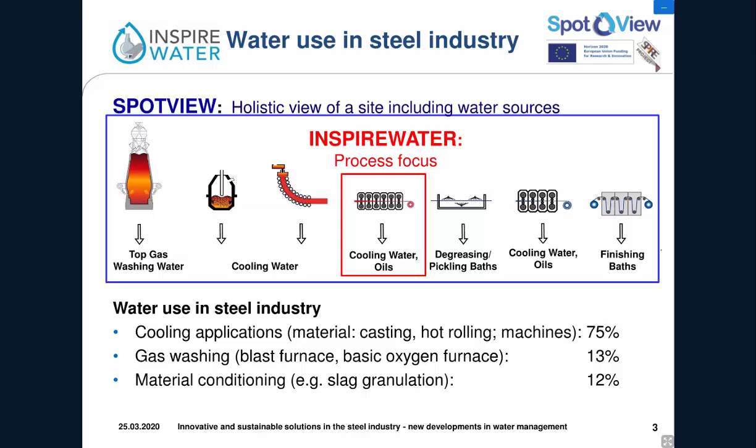So when we look at the challenges in this situation, we have an intake of different components such as solids and grease into the water, we have to add some chemicals to operate these water circuits, and we have the concentration of salts and hardness-forming components leading to corrosion and scaling. And as you can see, we have a complex mixture in these cooling waters, and this leads to a problem if you would like to apply just conventional technologies. These cannot work efficiently on this kind of water.

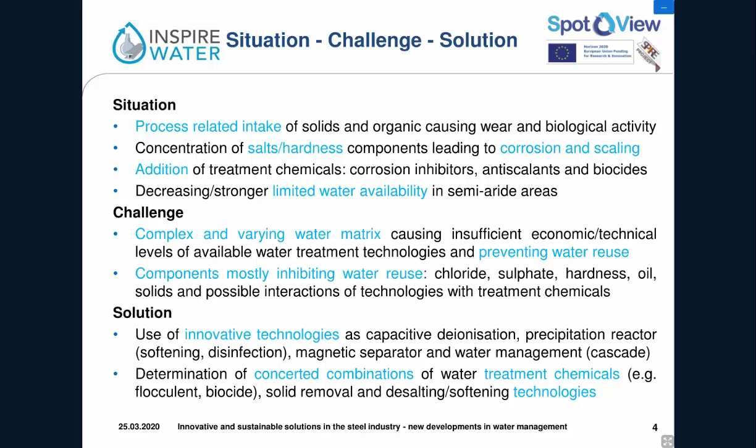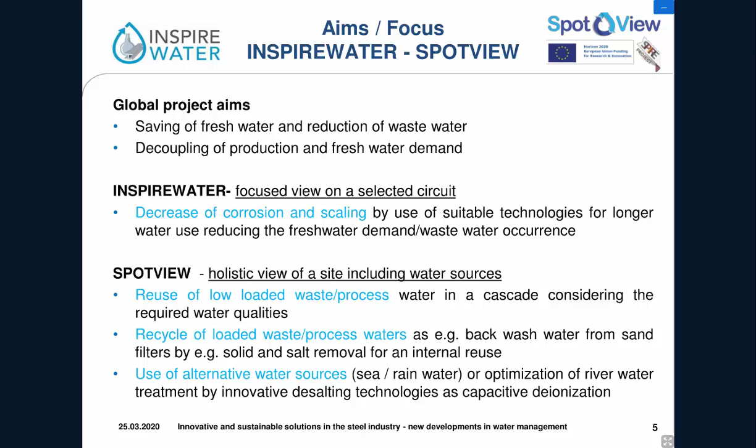So the idea was to use innovative technologies such as capacitive deionization, for instance, to optimize the water management, and to recover and take water from alternative sources. So the aim of saving water is well known, and decoupling production and freshwater demand is one of the most important issues, and I think this has to be solved, but solutions will take time and new challenges will come up. So what technologies did we use?

We used a magnetic separator for the removal of particles. It's operating chemical-free and pressureless. That means we will save energy compared to conventional pressurized filters. Then we had another solid removal technology. It's a combined flotation and microfiltration. The special thing here is that you are removing oil as well. So these two technologies are mandatory steps for desalting afterwards. So independent of the technology you would like to use for desalting, you have to have a special kind of water composition, and this requires removal of solids and removal of organics.

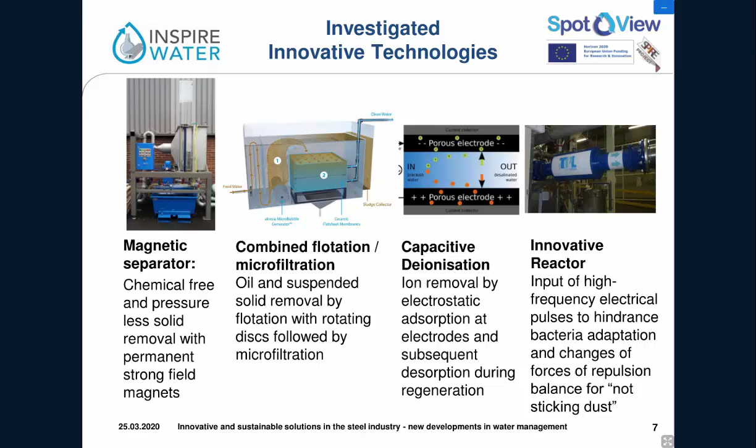Further on, we had the capacitive deionization. It is based on electrostatic adsorption. That means you are collecting the ions on the electrodes in one period, and you have a short time of regeneration where you release these ions again in a kind of concentrate which can be discharged. And the last technology was the innovative reactor, which is based on high-frequency electrical pulses, which destroy bacteria and change the water and particle charge, so that the particles will not stick to the tubes in any way.

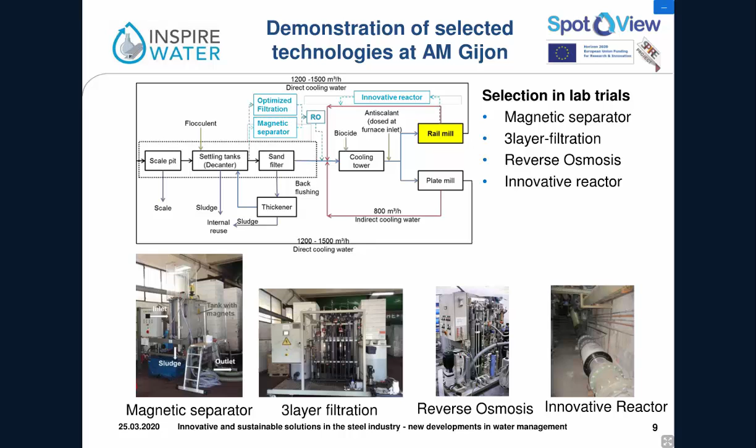So what did we achieve? We performed field trials, and in the lab things always go very well. So the thing is, let's demonstrate it at the site, and not just for a short time, but for about 4 to 6 months. And we did it in INSPIREWATER with the 4 technologies you can see over there. We have the 2 technologies for the removal of the suspended solids, we have the reverse osmosis for desalting, and we have the innovative reactor for disinfection and decrease of scaling.

So finally, what we achieved in half a year of field trial is the treatment of 31,000 cubic meters of cooling water, and we were able to achieve solid contents less than 15 milligrams at the outlet, independent of the varying inlet solid content. And we further achieved a very high solid content in the sludge we produced, about 31 weight percent, compared to 0.2 weight percent for conventional sand filters or multi-layer filters. And we had only a very low amount of sludge. That means you have a much reduced amount of sludge for post-treatment.

The three-layer filtration is a very nice option if you have existing sand filters and you would like to enhance the solid removal. Just replace the sand inside with 3 different layers of materials, and then you can increase the solid removal from 65 to 96%. Or the other option is to decrease the velocity as far as possible.

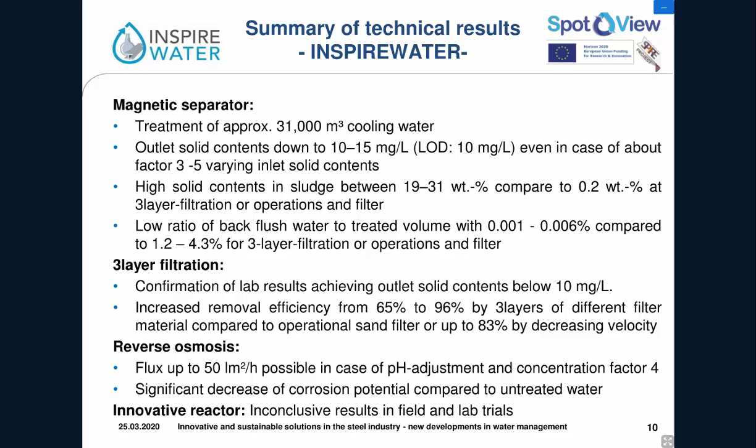With the reverse osmosis, we treated the water produced by the magnetic separator, the three-layer filtration and the operational sand filter, and we were able to recover about 80% of the water, fulfilling the requirements from ArcelorMittal to reuse this water again. Sadly, that's research: the innovative reactor did not show conclusive results in the lab and field trials.

Further on, in SpotView, we took this holistic view. We were focusing on cooling water. So we had 3 different approaches. One was to recycle water, as you can see on the left-hand side. And the idea was to recycle backwashing water, which is loaded with suspended solids of several hundred milligrams and with oil as well, and then treat it and use it again in the process.

The second approach is to make a cascade reuse, meaning an optimization of the water management, taking a look at the cooling water circuits and saying, okay, blowdown from this cooling water circuit can be used directly, for instance, in another cooling water circuit with lower requirements regarding water composition.

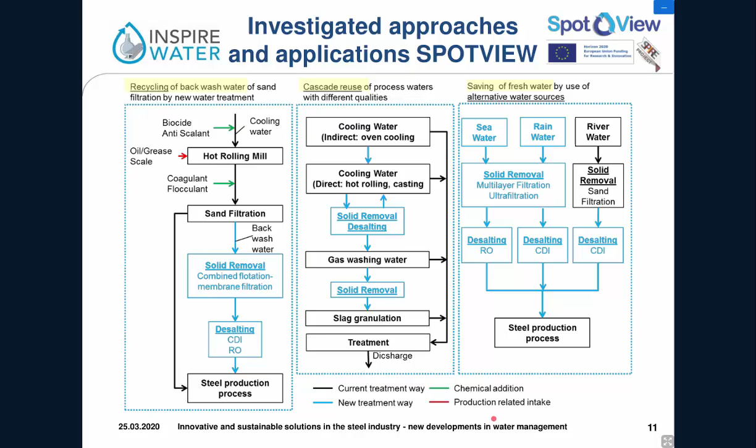And finally, we have the saving of fresh water, saying, okay, let's take a look at seawater, rainwater. What do we have to do with this water before we can reuse it, and determine suitable technologies regarding solid removal and desalting. So we produce with CDI, capacitive deionization, and reverse osmosis, different waters.

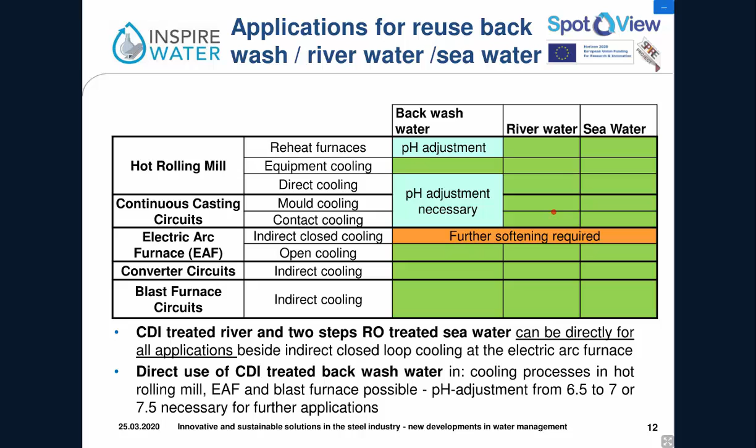And in one case, we have very special and very high requirements regarding water composition. But mainly, we can use the water we produce with CDI and reverse osmosis for further cooling water applications.

Here you can see some data, what we achieved regarding the backwashing water. You can see the flotation with microfiltration. We recovered 89% of the water with a very low energy demand of 0.3 kilowatt hours per cubic meter, and suspended solid content less than 3 milligrams.

CDI and reverse osmosis both allowed the production of a water quality which can be reused in the cooling water circuits of ArcelorMittal, and we had recovery rates between 78 and 85%. Regarding the energy demand, CDI was lower than reverse osmosis with 0.95 to 1.4.

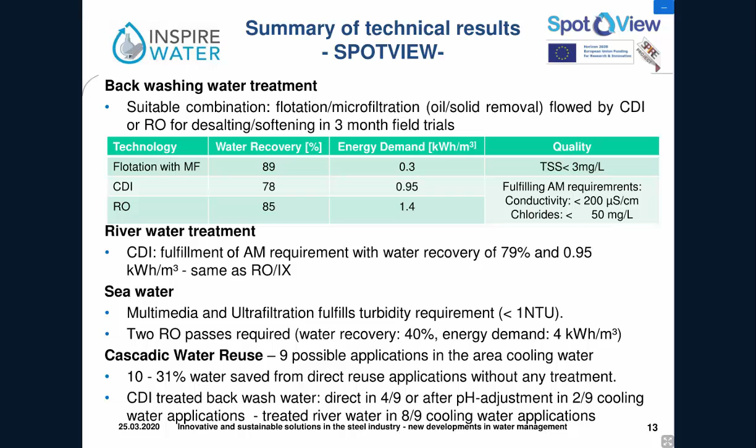And further on, we determined seawater and river water treatment methods to recover this water again. And as shown in the figure before, for most of the applications in the area of cooling water, we can use these kinds of produced waters again.

Backwash water we recovered with 89%, with the shown technologies, a combination of microfiltration and flotation, followed by desalting by reverse osmosis or capacitive deionization, and finally the dependency between product ton of steel and water was reduced by about 50%.

So if we take a look at these results, we can say we achieved the things we promised. The results were very good in the area of cooling water, but are now all questions solved? The answer is no, because we still have a lot of different waters in the steel industry, like gas washing water, which are much more challenging than cooling waters. We have waste waters from other purposes, and we need further developments of technologies which allow us to recover these waters as well.

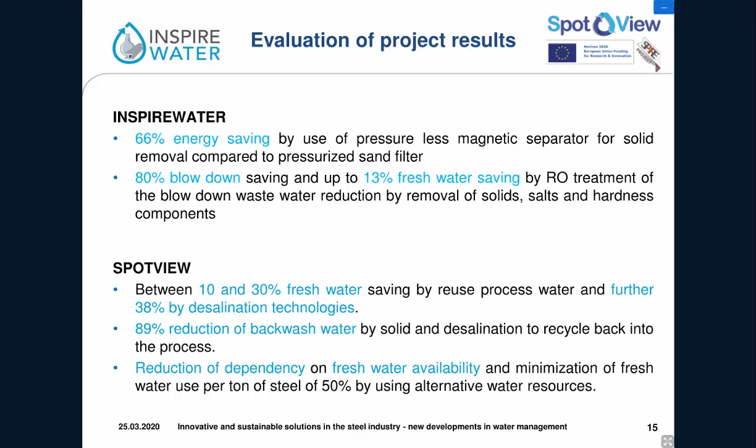So the first one is, what kind of material is used for the 3-layer filtration? It is a kind of sand, it is a garnet and anthracite. Okay, thank you.

Then do you have figures about the total cost for the purification of water per cubic meter? Or we do not have... maybe tomorrow. Well, I'll just give a range. The costs for desalting with capacitive deionization and reverse osmosis are more or less on the same level.

Okay, and the last question is the average consumption of water per ton of steel produced, or the range? It depends on the site. We have everything from 8 to 40 cubic meters per ton of raw iron, but it depends on the site, it depends on the local conditions, and it depends how people are counting the water. Some people consider this and this water circuit inside, others not. So this is the reason for this big range.